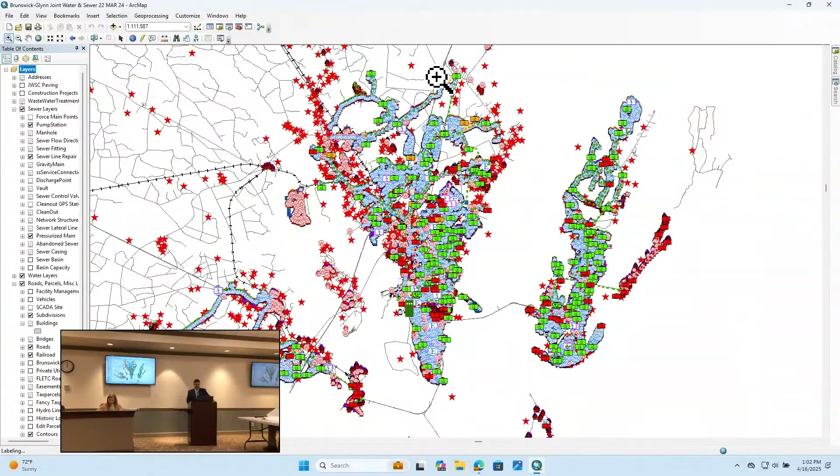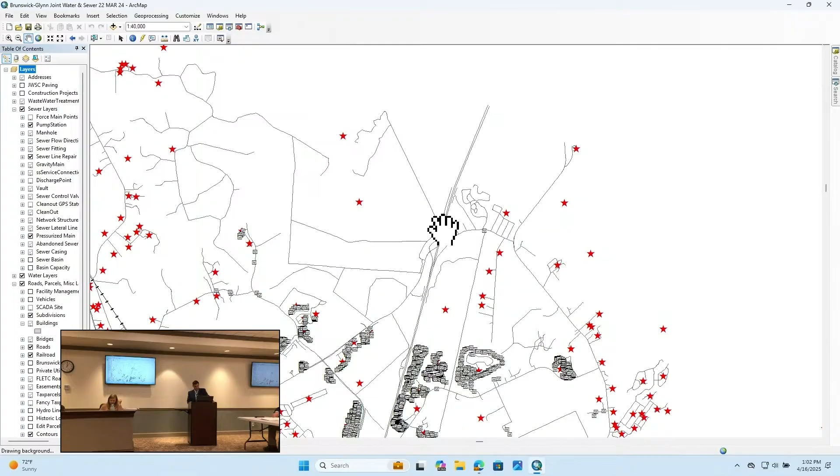So Hoyer Investment, HIC Altama, owns the property on the northwest quadrant of Exit 42. And we approached them about potentially acquiring property from them to construct a new wastewater treatment plant to service the North Mainland area, essentially the area along Exit 42 down Highway 99. They were willing to discuss, and as part of their discussions, we, at the February meeting, brought forward a proposal for 16 acres. Today, the proposal is to acquire 20 acres from them per that discussion. And also, they are installing larger diameter gravity sewer pipe opposite the direction they would need to flow from their development back towards the new plant site.

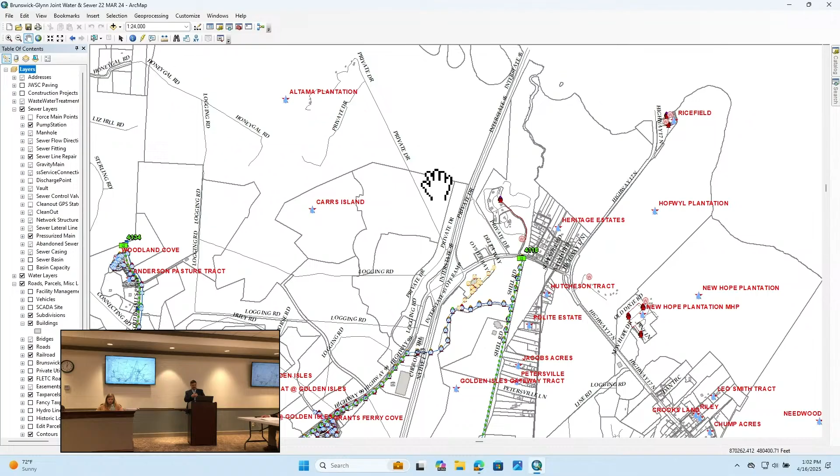So essentially, their development is here on the screen. They could gravity flow back out into this intersection here, or proposed intersection at Highway 99, but they are installing gravity sewer back towards the north, towards the plant site, and they're installing larger diameter gravity sewer above and beyond what they need. And they're also in the process of installing force main all the way, and a pump station all the way to connect into the force main on Shell Road at pump station 4118. So all of that is under the works right now.

And so the agreement that is before you is to acquire the 20 acres, and because of the discussion at the last meeting, the agreement lays out that within 60 days we will contract with somebody to do the survey of the 20 acres and then get that appraised at today's market value for that 20 acres. And then once the on-site construction activities are complete, the on-site construction activities are all of the work all the way to this connection point here, the value of that will be appraised against what the value would have been for improvements that would have been required without the wastewater treatment plant.

This agreement would provide them credit in the amount of that difference. So the value of the property and the gap in the larger diameter gravity sewer and the temporary pump station that's being put in place and the force main improvements towards, they could use for tap credit on their property, which is approximately 2,000 residential units plus some multifamily and commercial units along the road frontage.

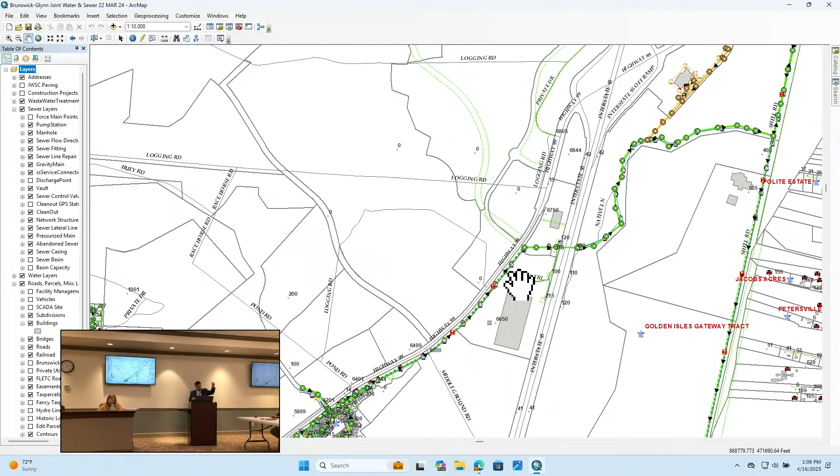Mr. Dormany is here, can speak to the agreement as well. We have representatives from Hoyer and their engineer, Thomas & Hutton, and we'll be happy to take whatever questions you may have at this time.

The 20 acres we talked about last time, it was 16 acres right here. The other 4 acres we discussed would be off of the west side of the original property, which would increase the amount of available buffer space we would have between the residential development and any active wastewater treatment equipment.

What's the schedule for them starting the project? Starting which project? They're actively putting the pipe in the ground now, and on site on the first 2 phases, or just the first phase? Just the first phase. Just the first phase right now.

So when are you planning to turn over lots for construction right now? Yeah, it's probably going to be Christmas and maybe January. So end of the year, first of the year, start building houses out there, roughly.

So the on-site phases are currently underway. When do you think it'll be completely built out? Or 50%? And as you know, sir, construction of a wastewater plant is a 4 to 5 year process.

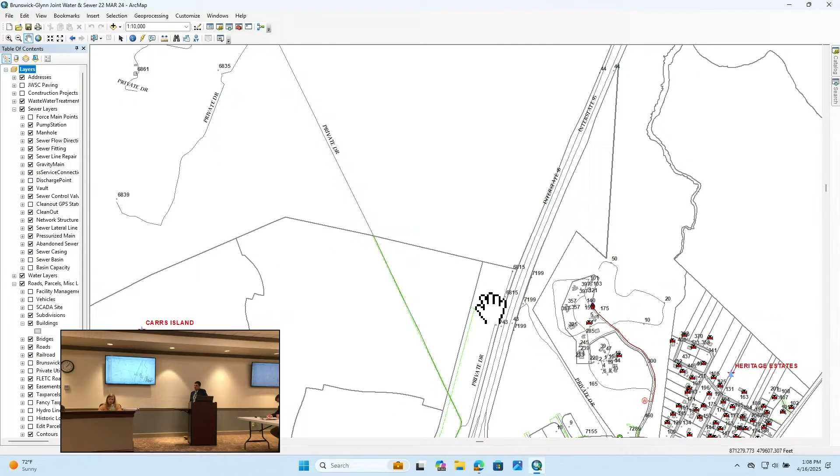So we have access through the property. Are the roads in there now? Have you already cleared for all the roads? We are constructing roads currently as part of the first phase. All the roads within the project are anticipated to be turned over to Glynn County to make public right of way.

As of right now, there's access all the way up to the temporary pump station via the existing WMA road that is owned by HIC. There's an access easement on it for WMA to use, but that can be used by anybody coming to the property to get to the existing temporary pump station.

How do we have access? Will our access change over the period of time? No, so we platted an access easement that goes all the way up to the southern boundary of the property. That's a part of our subdivision plat that we initially created. And so you'll be able to use that.

Obviously, paved roads is going to be public. Once that paved road stops, you will have access via that private access easement in order to get all the way up to the pump.

Basically, we probably won't even have that. You'd probably go right up to the treatment plant site just about, won't you? You'd probably almost go all the way up to the treatment plant site with your road for the setback. Long term, yes, sir. Yeah, once the roads are constructed, they will go right up to the treatment.

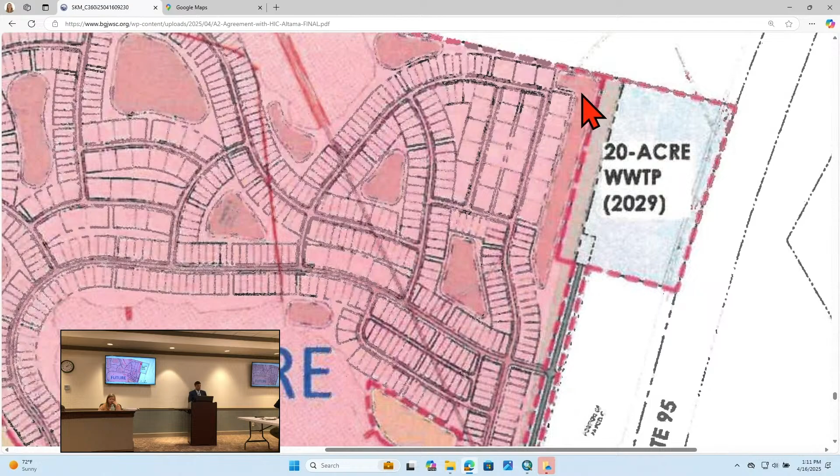Chairman, once the survey is completed, the developer is going to provide a temporary access easement for construction, so we can go ahead and start doing work on site while we're going through that process.

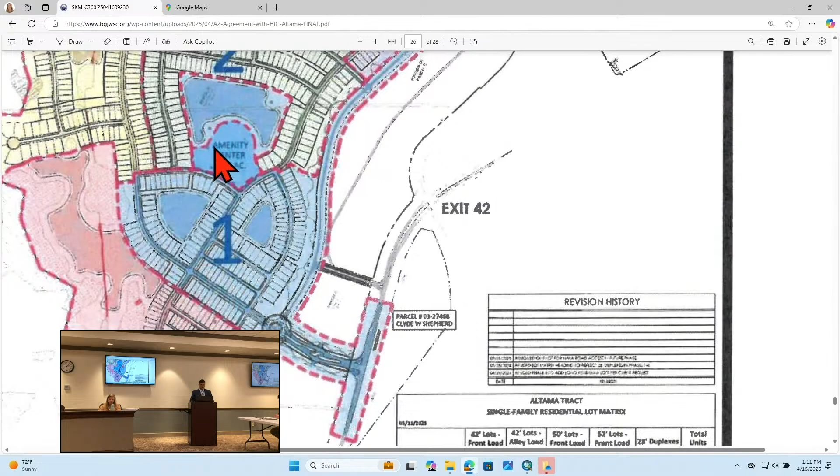So they're building out to here right now. This is the temporary pump station site, and this is the first 6 phases, which is roughly 800 lots. Then this is the future phases that would come on as they did additional work at a later date.

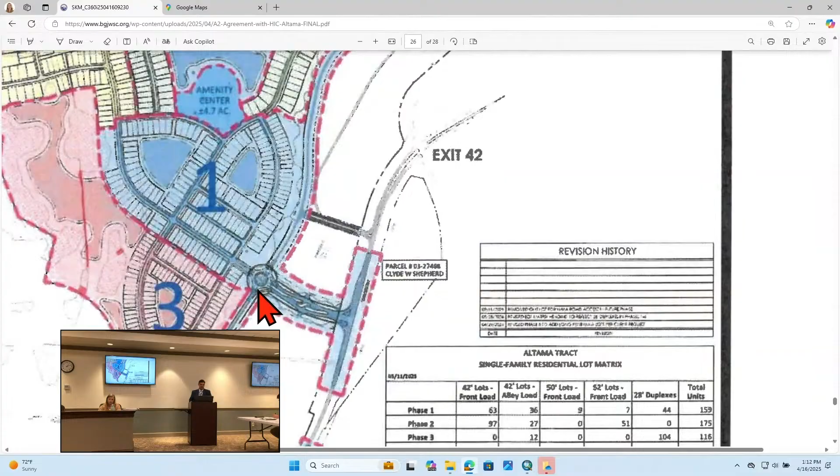Roundabout coming off 95 -- it'll be right here, right? Right here, yeah, right here and right here. You'll have to go through that roundabout off of 99. And they have one internal to the property too.

How do our trucks, sludge trucks, get to Academy? They would come down this roadway and then go down 99, likely all the way to 341, and then come down from 341 at the Sterling intersection, because otherwise we're going to spend a whole lot of time sitting on the spur. I don't want to do that.

The future well-lit intersection of 99 and Golden Isles Parkway will go through there. Hopefully. Hopefully soon.

So again, today we don't know the value. We're just agreeing that if we move forward with this, whatever the value is appraised at, that is the value of tax credit they will be receiving. So we can't give you a specific dollar value today, but it's estimated at around $5 million.

Do we have a motion? Mr. Chairman, I move that the Facilities Committee recommend entering into agreement with HIC Altama LLC for 20 acres of property and additional infrastructure improvements for enhanced water and wastewater services along and near Highway 99 and Exit 42.

I'll second. Motion seconded. Any other questions?

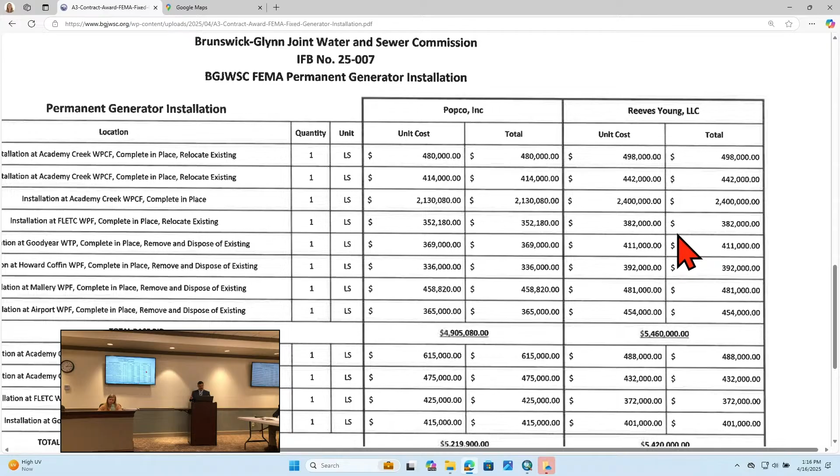So the 1,500 kW generator, let me pull up the site so I can show you, will be located very near the operations building, and there'll be quite a lot of conductor that has to be run. That large diameter wire is where the bulk of the cost is with this large generator installation.

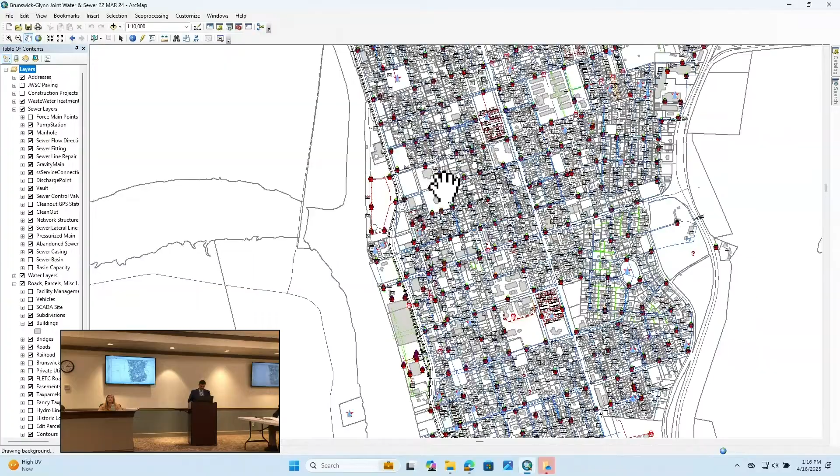Where am I at? I'm way too far south. There we go. We got too many layers on here, got to turn this thing off.

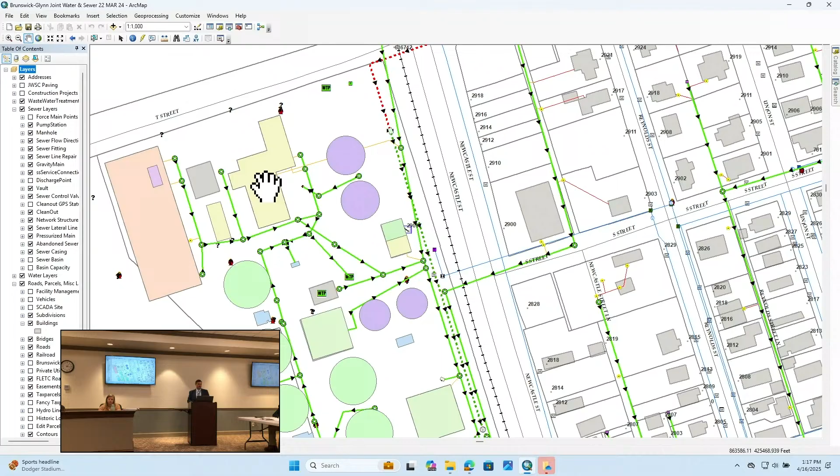So this is the operations building here, this big yellow thing. We're going to be putting the generator in this vicinity right here. It requires building a platform and installing a new transfer switch. We'll be running conductor down the roadway into the solids building, over to the UV building, and into the backside of this building. That's where the bulk of the large generator cost comes from, the construction of the platform and the conductor. My understanding from talking to suppliers, there's approximately $1 million worth of wire in that job for the size conductors we're running.

So the other ones you can see, there's 3 of them at Academy Creek. The one large one, the other 2 small ones will be replaced. Then there are 5 well sites: FLETC, Goodyear, Howard Coffin, Mallery, and the airport. All 5 of those will be replaced with new generators. All 8 generators are currently on site at Academy Creek, ready to be relocated.

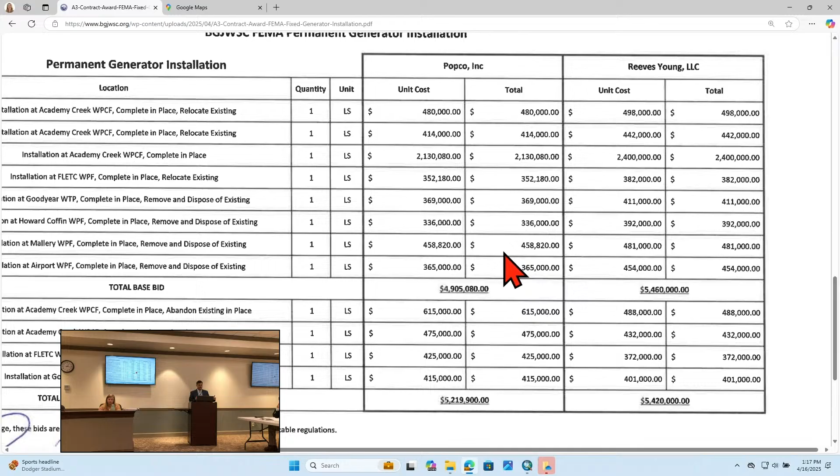The low bid is from Popco, who has done a considerable amount of work for us recently and is actually very near ending a lot of the work they're doing with us, so this timing is going to work out pretty well. Again, the low bid was $4,905,080. So the combined cost for the purchase of the generators and the low bid is $6.1 million.

That $6.1 million is substantially over the approved funding for the FEMA project of $1.3 million. We will be requesting a budget adjustment from FEMA. However, we have no guarantees that will be granted. So if we award this today, it is at risk that the additional money will not be granted. However, we've got 8 generators that aren't doing anything if we don't award and put them in place.

You can't put that 1,500 generator closer to the building? Not because of all the additional piping that's in the ground back there. There's a spaghetti of pipes back there, so there's very limited options where we could put it. Also, it's 40 foot long, and space is not something we have a great deal of at that site.

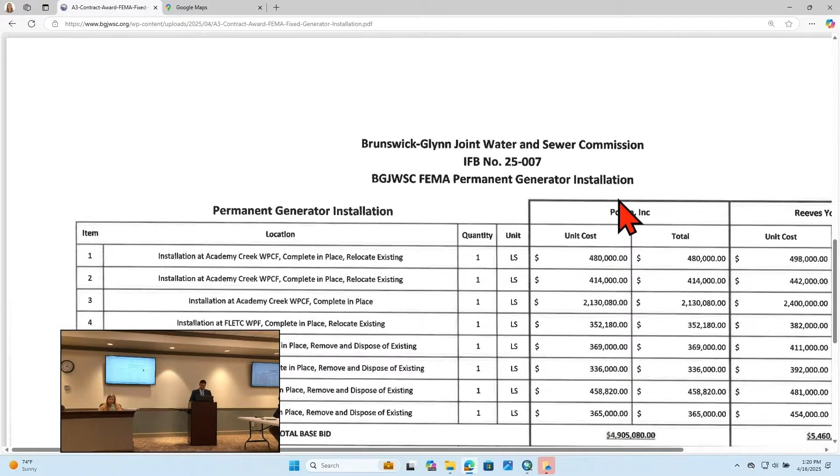All right, so this is, I'll say, the numbers confuse me.

What we were planning to do, if you look at the bid - and FEMA likes you to do it this way - is a complete in-place, one number approach. It states whether we want to relocate the existing generator away and put it in the same place, or if we want to abandon the existing generator in place.

So we bid out the ones that it made sense to potentially save us money on, abandoning the existing generator in place and relocating it to install a different one in a separate location. The numbers did not seem to matter much, or went in a direction that didn't make a lot of sense to us. So we are recommending the base bid on this rather than any of the alternate items.

And the base bid is to remove and dispose of all of them that are currently in place. They're not disposing of them on site - they'll be relocating all of them to Exit 29, to the Southport plant, and then we will dispose of them for scrap value. And we'll rob whatever parts we can off of them that may still be useful.

Most of them have quite a lot of age on them. There's one of them that's not in too bad of shape - we might be able to repurpose it, but the other ones are either non-functional or are very much band-aided together to keep them functional right now.

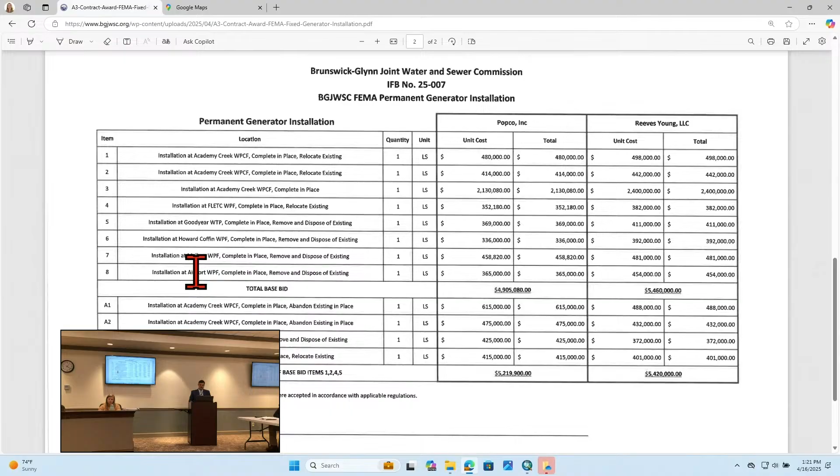And the transfer switches, have they been installed? They are here, they're not installed yet, but we have all transfer switches as well. They have to install the transfer switches - do they have to do both portions? Yes, so this is transfer switch, generator pads, the whole nine.

What did you award that to? Two separate transfer switches. We had pump station transfer switches installed for the first portion of the GEMA contract. These fixed generators came with new transfer switches that have not been installed, but that is not any of the locations where the previous transfer switches were installed. We were also awarded a second phase of the transfer switch project for more pump stations, which we have to put out for bid, but none of these locations are the same.

So all of the transfer switches are at sewer pump stations. These are all either the three at Academy or at water well sites, so they're not any of the same locations. And they are all Cummins diesel generators that we purchased.

We don't have one at the North Monument site yet. Not yet, no sir - that would be purchased during the project.

This is going to consume most of our uncommitted funds - most of our uncommitted R&R funds right now, yes sir. If we don't get them redone, yes sir.

We're still waiting on reimbursement for the first phase of the project. That's not going to be a huge amount of money, but we're still waiting on that. And of course, we transfer funds into that on a monthly basis, so we're going to keep utilizing those funds as we accrue them, but this would consume the bulk of the currently uncommitted funds for projects.

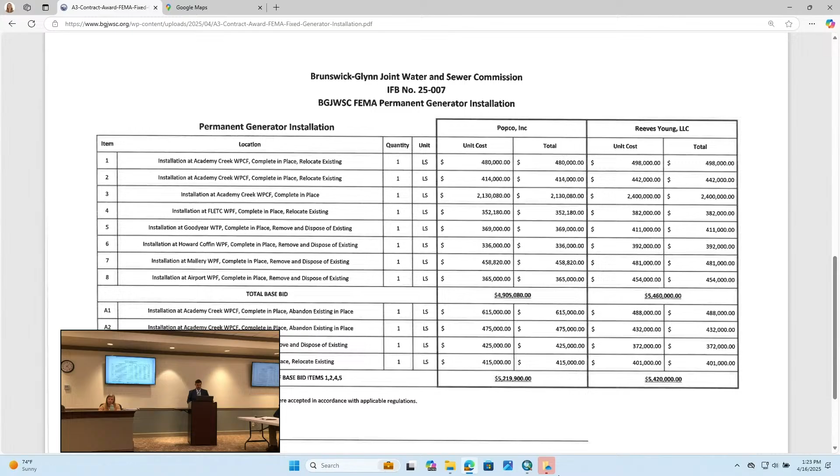How, based on our past record, does the uncommitted funds grow if we're not tapping it? We currently transfer approximately $750,000 a month into that uncommitted funding, so it's about $9 million a year.

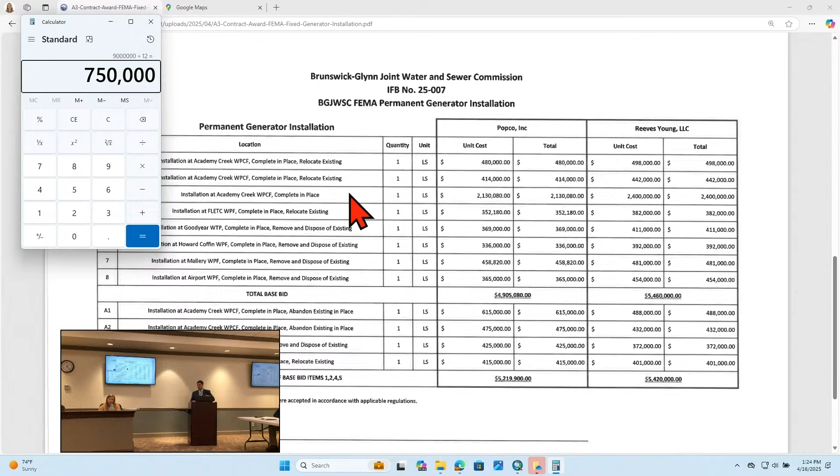Next year's budget, which we'll talk about at the Finance Committee, puts $10 million in there, so that would be about $800,000 a month that would go in there at that point.

When did they start design of this? They did sizing of the generators first. We waited 84 weeks for the generators to get here, and then they started design after that - so they probably started design on this late '23, mid to late '23, sometime in there. Yes sir.

It did take a little bit of time to get the design completed, particularly once we had to get a structural engineer involved to design the platform for the big generator. That stalled us for a few months as well. So yeah, we were awarded funding in 2020, but by the time we sized the generators and got them bought, that was a two-year process.

How are they going to raise that up? Concrete. We're just going to pour concrete to get it out of the floodplain.

There again, the belly tank counts. Where's it located on that site? Well, I don't remember exactly where it's located now, but if you give me just a second, we sent an addendum.

Krista, you didn't delete my addendums off the website, did you?

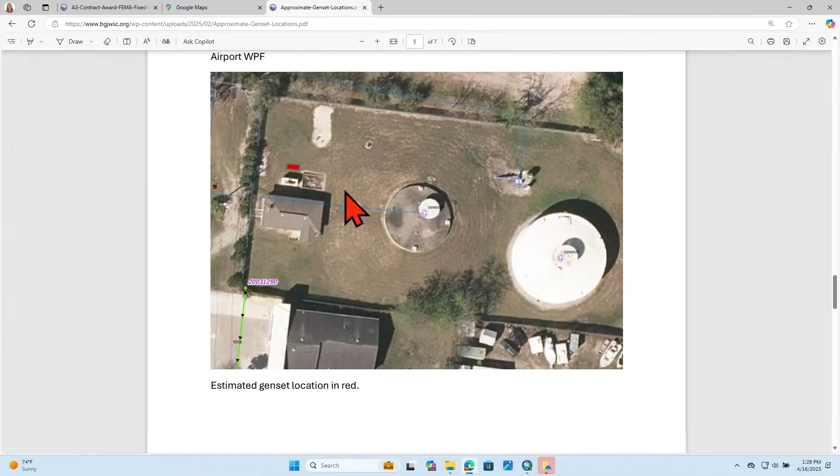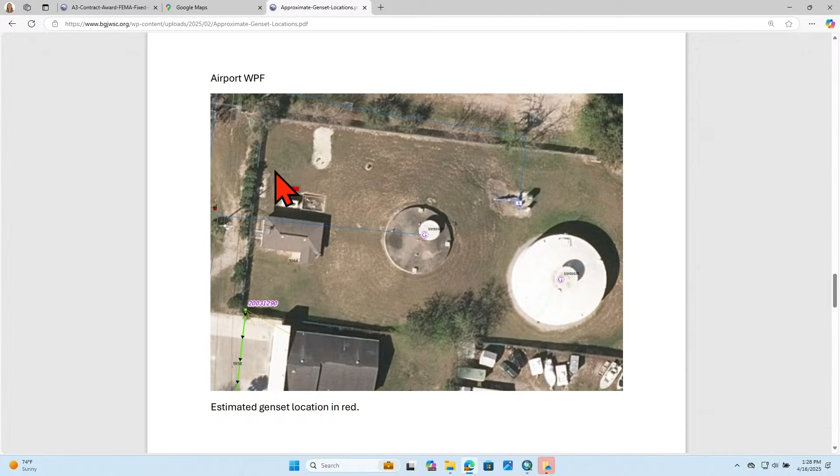And then this is the airport site on St. Simons, which is probably our most open well site we have. If we had this much property at every location, we would have much more flexibility. So it'll go right here behind the existing generator.

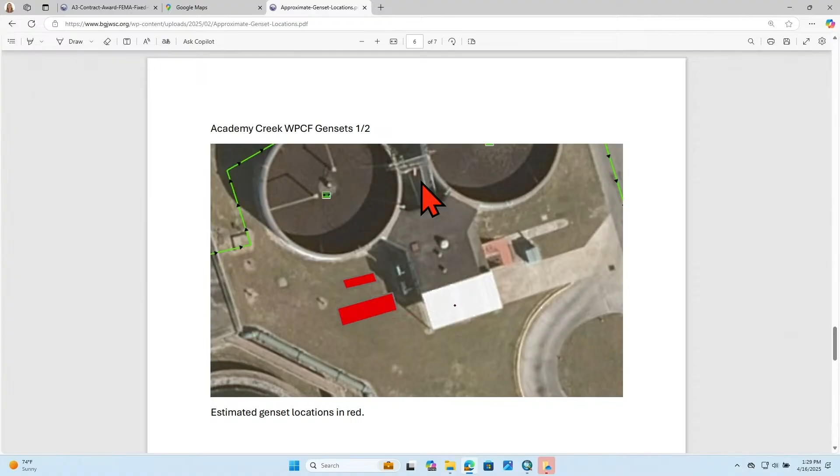And then Academy, the existing generators are in this brick building here. We'll be setting the 750 and the 450 here, right outside digester 2. And then here's where the new generator goes, this building is no longer there, that was a portable building that has been moved. So we will be consuming a portion of the sidewalk here, but...

Where's that? This is, okay, if you're over here, this is the admin, this is the lab building. This is the admin building and the warehouse. This is digesters 3 and 4.

Because of the way the drain system works out there, we're very limited in the places we could actually put a generator this size. So they're going to basically run conductor all the way down the edge of this building, paralleling this gravity main to stay out of having to cross that gravity main with those large diameter conductors.

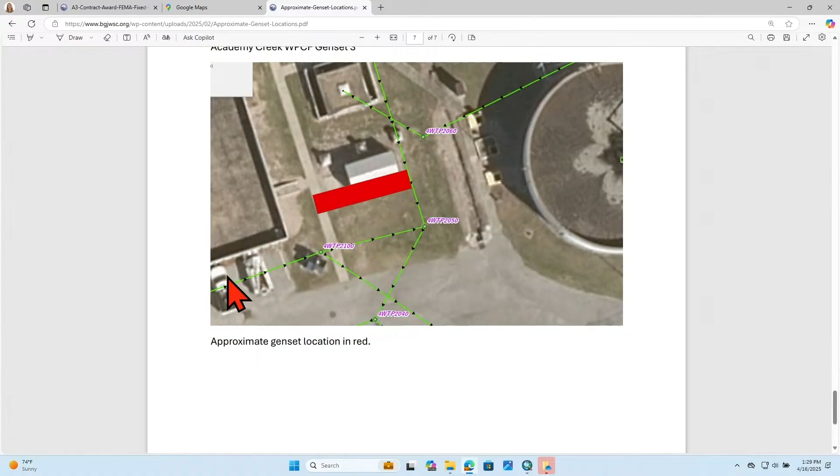What structure is that right to the left, Andrew? This here? This is the warehouse, the old DAF building. And this is the old Pinova pumping building that doesn't do anything anymore.

So we talked about tearing it down and putting it here, but then you got a whole process of demoing that, rebuilding the slab. So that was actually going to cost us more money, and we went through that process of examining that for a while.

If you go down there now, this generator is sitting right here off the side of this digester now.

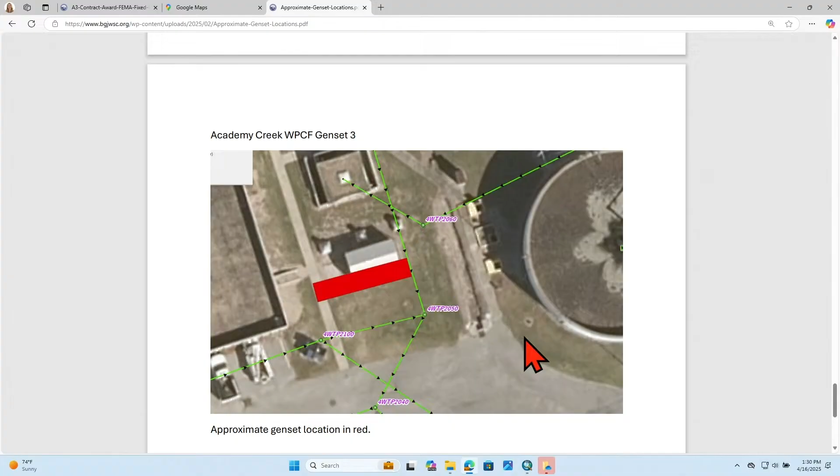How long do they have to do the work? 9 months. And the first 3 they're required to do per the bid documents are the 3 at Academy Creek.

When we paid for the generators up front, we paid something and they get reimbursed, right? Yes, with the FEMA process. Until the project is complete, you cannot request partial reimbursement. You have to finish the project, then request reimbursement. So we've paid for those for a couple years now, but we can't request reimbursement until they're installed and in service.

Another reason why, we're loaning the government money. Right now, we've loaned them a pretty good bit, about $1 million that we're waiting on reimbursements on right now. So when we get the reimbursement back for the first phase of the transfer switch, that will help go into the uncommitted funds as well, as you were talking about earlier. So there's things like that that help rejuvenate those funds.

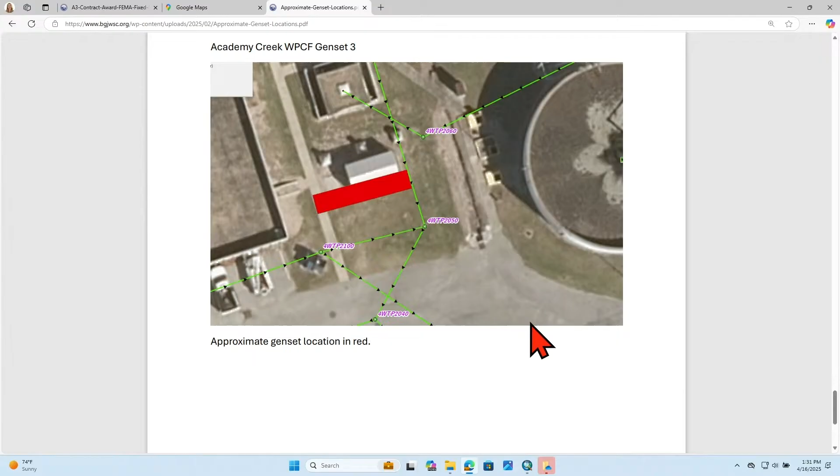No, we have not taken a motion. I move that the Facilities Committee recommend awarding a contract to Popco for the installation of 8 fixed generators in the amount of $4,905,080. Second. First and second, any other questions? There's 3-0. Thank you, Andrew.

Dedication of easements and infrastructure, Mr. Kline. All right, Mr. Chairman, Commissioners, good afternoon. We have 3 items on here. The first 2 are associated. They're side-by-side easements resulting from 2 adjacent property owners requesting an alley abandonment from Glynn County. These 2 are on St. Simons Island, just off Circle Drive. And the third one is an easement we've acquired to help facilitate, actually critical for us to facilitate, Division 3 of our Exit 29 water loop project.

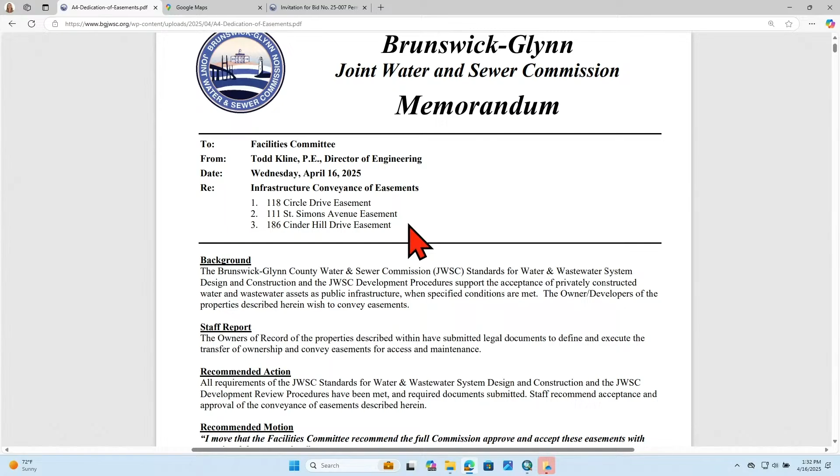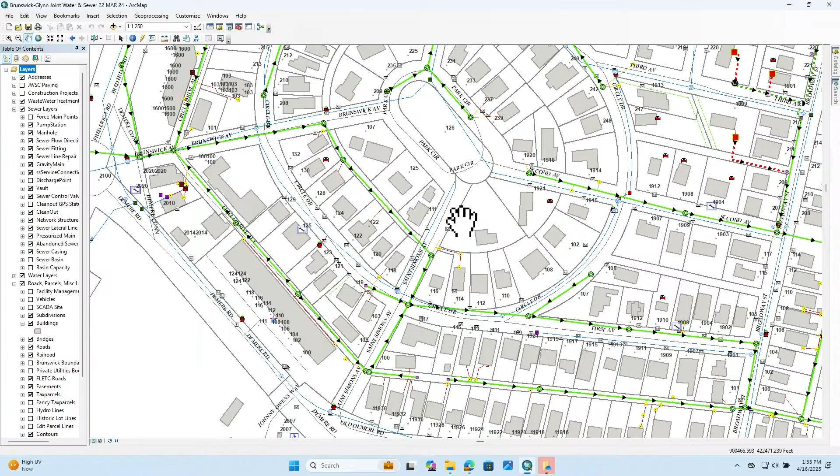All right, jump down here and show you the locations of these things. First one, Circle Drive, just north of the St. Simons Island Airport. Sorry, got you off your bookmarks. That's why I bookmark them. Let's see. Okay, all right, so this is the area we're talking about here, this alley section in here.

Within which Joint Water and Sewer Commission does have water and sewer assets. In this case, it's a gravity main, needs to stay there. And so we've obtained an easement from 111 and then also 118 right here. These 2 property owners submitted to dedicate easements to us for that. We have that sheet in our...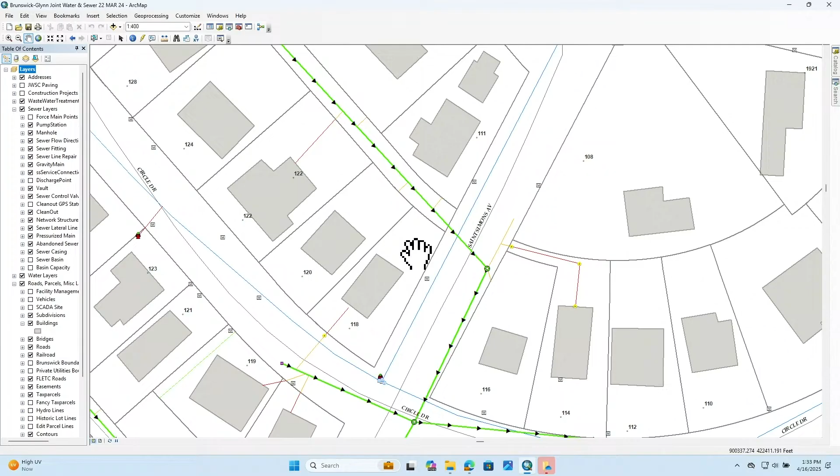There's an easement screenshot plat of it. I see this, I don't see anything. Do y'all see this one? Pull it up on the screen also here. Yes, sir, it's about halfway back in that item in that packet. It folds out. So past the easement documents, there should be... there we go, something that's folded together there. Yeah, this one right here.

And the first 2 items are going to look exactly the same, basically the same easement plat, where it's referenced in the legal descriptions. A separate one for each easement.

This is pretty typical. We see a lot of unopened right-of-ways. Property owners have the right to request abandonment out to the middle of said unopened right-of-way, which extends their frontage on that right. We see these as they come in as abandonment requests through Glynn County's review process. First thing we do is check what assets we have there, and second, is there any potential for future joint water and sewer assets? If so, we will typically request, as a condition of joint water's endorsement of that abandonment, provision of an easement.

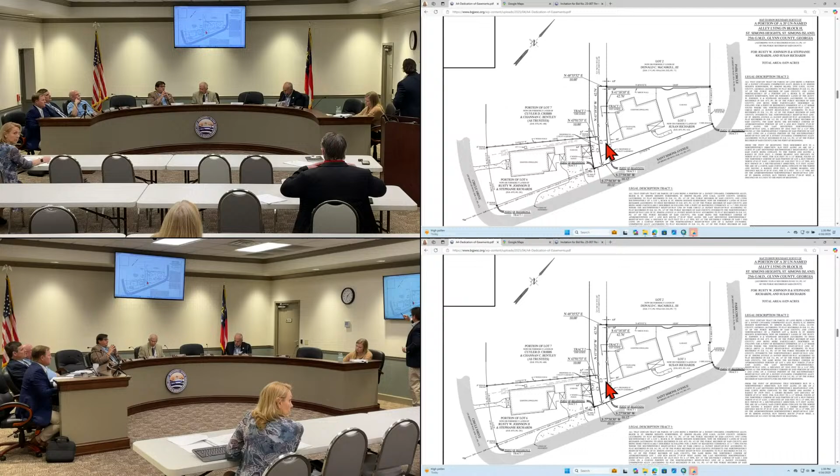What are we requesting? What do they want on this? Well, they're granting an easement over existing sewer lines because they're requesting the county abandon the unopened right-of-way to them. So the two property owners are right here and right here. This property owner wishes to abandon, or for Glynn County to abandon, this portion of their alley, unopened alley right-of-way. This property owner wishes for Glynn County to abandon this portion. And we have a sewer main that runs down this unopened right-of-way.

So what size easement will we have? It's total width... 20 foot, it's 20 foot. County's abandoning the roads and we're getting an easement, is that right? That's correct. It's not a road, it's unimproved right-of-way. Yeah, they call it unopened alley, unapproved, yeah. It's currently public right-of-way, but it's just not used for public ingress egress.

No, sir, because it was public right-of-way, unopened, there was never an easement. So what size easement are we going to have? Each one is donating—well, the abandonment is to the center line of the unopened alley, so it's 10 foot on either side, so it's still going to remain the 20 foot that it is now with the right of way.

Everything else above here is going to remain public right of way, unopened. As adjacent property owners see what happens here, they're probably going to request theirs, and typically that's what happens. But that hasn't come to the county yet. No, sir, these are the only two that we've seen. But this is fairly standard for the county to do this at this point.

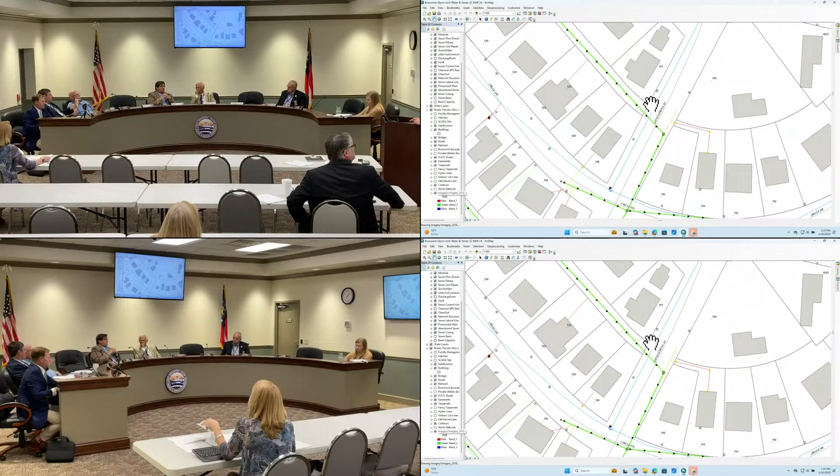If they're not trying to alter the alley, it's fairly standard now. Back when a lot of this was installed, they took advantage of those unopened right-of-ways and put lines in, so that's why we always request the easement at that time.

That gives a little better picture there. You can see that it's obviously not used, or apparently not used, for travel. It's heavily wooded. We should probably get in there every so often and make sure we get the old sewer easement mains back in.

Okay, south end. All right, so if no more questions on that one, let's take a look real quickly down at Cinder Hill. This is the exit 29 area.

Here is the exit 29 treatment plant. This is where our exit 29 elevated storage tank is going. We're going to have a water line that connects out to the water main on Southport.

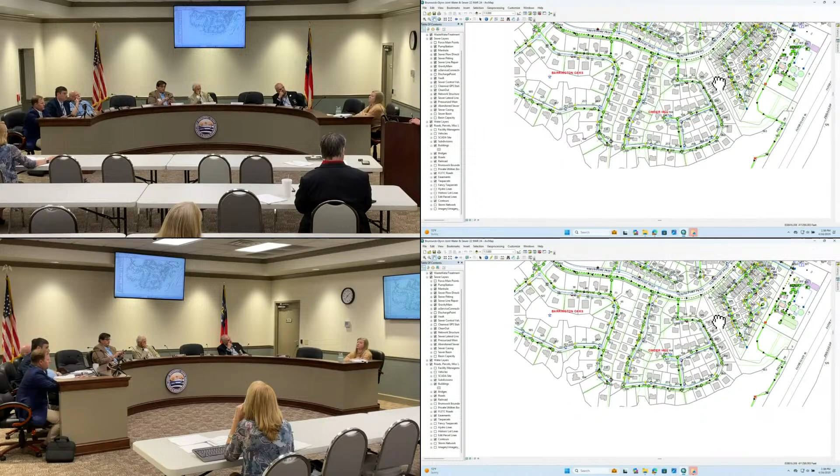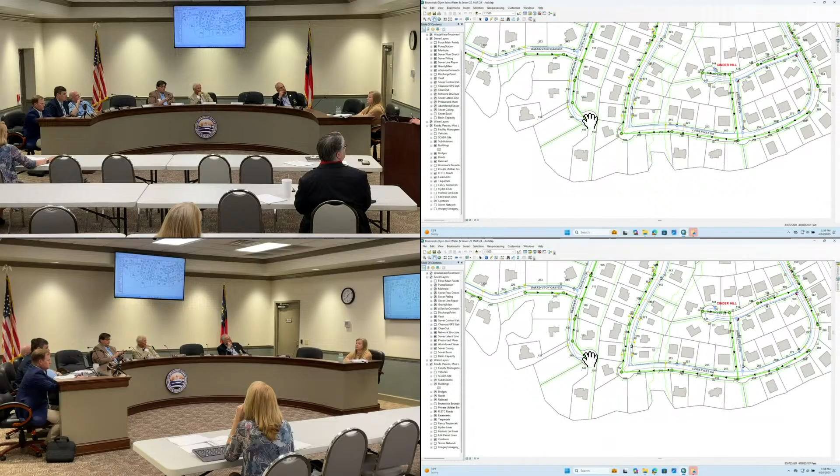And then as part of the third division of this project, we're making two key loops. We're actually going to loop up here on Cali, back out here to the water main on Southport. The second loop is going to be here between these two subdivisions, Cinder Hill right here, and then Barrington Oaks.

In order for us to do that, we needed to obtain an easement from either one or both of the property owners. The property owner at 186 Cinder Hill Drive was receptive and has agreed and endorsed dedication of a 10-foot water main, water and sewer utility easement for our water main on his property wholly. So the whole 10-foot easement will be on this side right here.

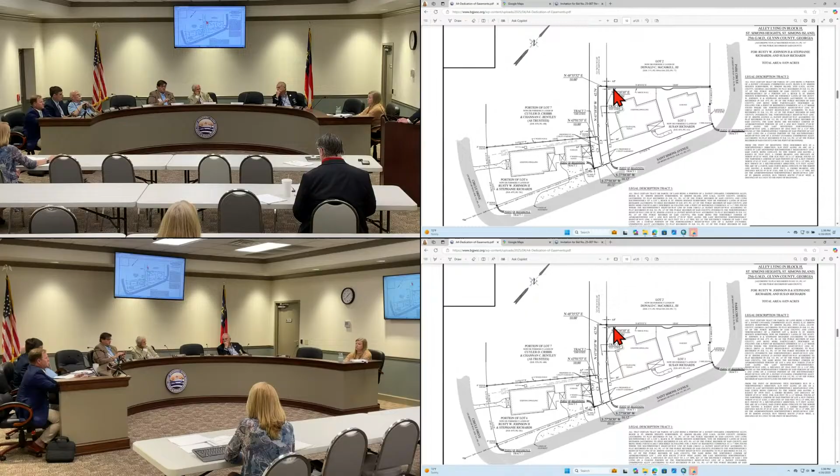And then when we connect those together—currently both of those neighborhoods are single fed off of Southport Parkway—so once we connect them together, the single feeds into each neighborhood will actually make both neighborhoods be looped out there, which will help water movement, flows and pressures out there. That's right, here's a plat for the easement.

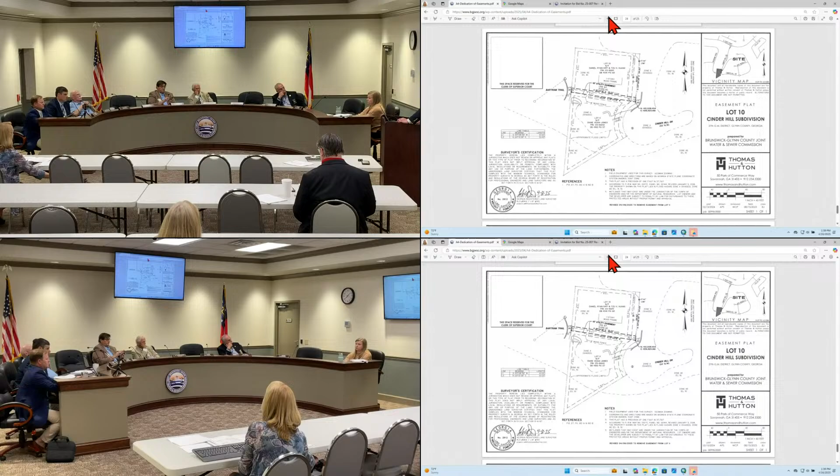Is that the water line we're putting in to serve the tank? Not to serve the tank, but when we were doing the tank project, we were looking for locations that made sense while we were down there to go ahead and install these loops.

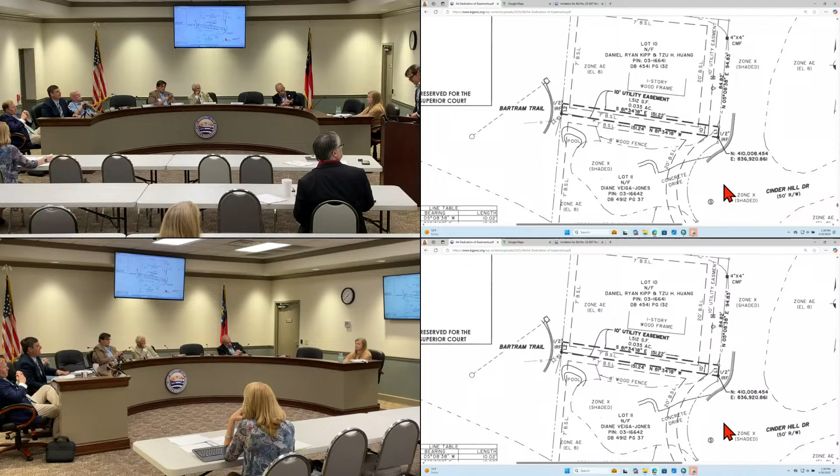We try, as part of the private development review process, to get loops where we can. Sometimes it's not feasible, particularly if neighborhoods are built at different times—there's already structures in the way. So this didn't happen at that point, but this will be a very helpful, real convenient loop to help stabilize flows and pressures in that area.

So we're just asking for an easement on this. A total of three easements, correct? The first two are associated there on Circle Drive, and this third one is in between Cinder Hill and Bartram Trail.

Where are we on the encroachment on the water line we want for the new well? Did we get anywhere on that? We don't have to dwell on that now. No, that's not impacting here. That's part of feeding the new elevated tank, the Cinder Hill tank.

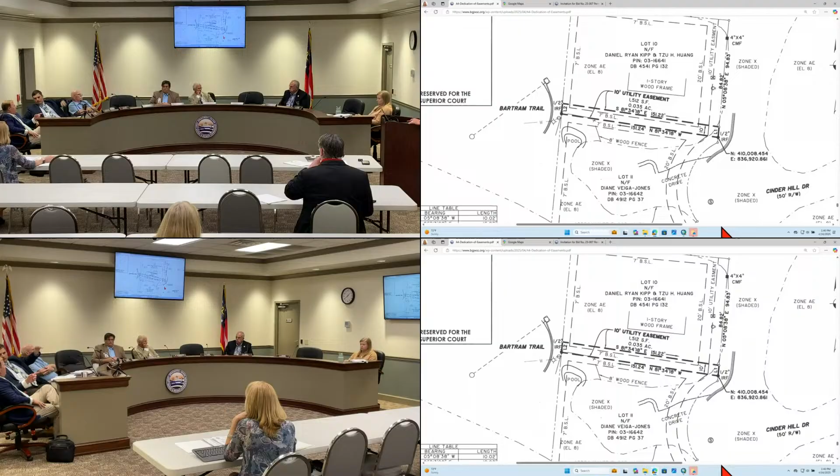I think he's understanding what is being requested. That's the guy who's—but he is encroaching on us. That's correct.

Okay, he's got the swimming pool, right? Yes, sir, that's it. So the property line here, this is joint water property, it's a parcel actually, so their existing fence comes as far in.

What we approached him about was essentially putting his fence up against his pool decking, and whatever property is required to go outside his pool decking, he would get that resurveyed, appraised, and then he would compensate us for that amount of property. That's in the process of being worked through and on track to not be a further issue.

Yeah, I don't think that will come into play with the project for a while, because once the tank site gets built, the water line will be one of the later things that goes in. Okay, I didn't mean to get us off of that, but...

Well, can I have a motion? I move that the Facilities Committee recommend the full commission approve and accept these easements with associated documentation. Second.

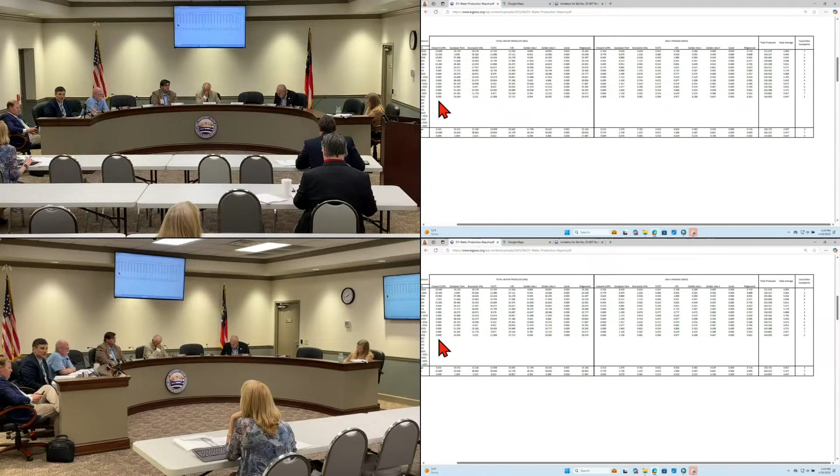On the mainland system, the Howard Coffin well is very near being brought back up. They've completed the grouting of the new casing. Remaining items are to reinstall the well pump and motor and get it turned back on. So unless something wildly unexpected happens, it should be back online by the end of this week.

The Goodyear Park well is taking the brunt of Howard Coffin not being online, so we really need to get Howard Coffin back online to knock some of that usage off of Goodyear Park. Excluding that, Brunswick Villa well hasn't been used very much. We're trying to use that less and less whenever possible. It does come on, we turn it on manually periodically, but we try not to turn it on automatically due to it being the closest one to the saltwater plume.

Across the board for the month, 4.6 million gallons a day on the mainland, and 2 water complaints, both dirty water complaints post-flushing, which tends to happen when you flush lines, stir stuff up, and then when it's been sitting in the service, you get some dirty water when you turn the faucet on. But you do see a slight reduction in water usage from this time last year.

Some of that could obviously be leaks being corrected by customers who were notified about leaks through the new meters. Some of it could also be lack of water use from a previous large industrial customer on the mainland impacting that.

For St. Simons for the month, that system was pretty well balanced considering the densities south and north, at 2.4 million gallons a day on St. Simons for the month of March, very much in line with where we were last year. It's kind of remarkable how close it tracked the first 3 months of the year, with very limited flow differences month to month, as we head towards the peak of tourist season where we'll have the most water usage on St. Simons.

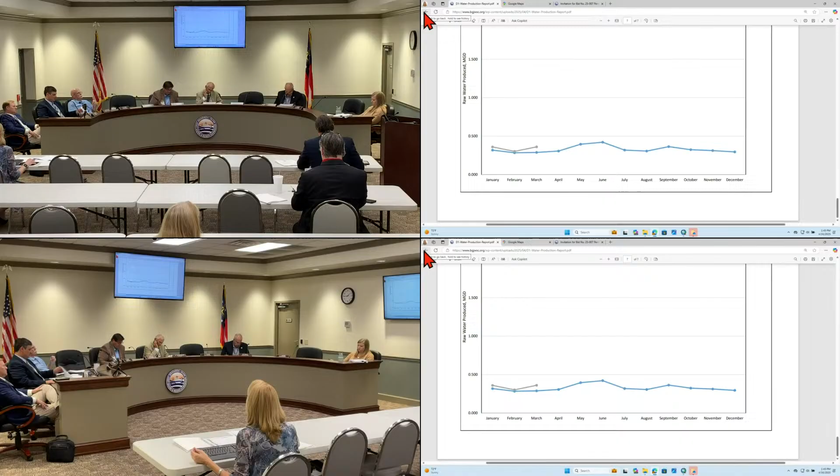Any questions on the water report?

All right, Academy Creek for the month on the wastewater side, 6.4 million gallons a day leaving the wastewater plant. Actively under construction wastewater plant. If you go down there now, there are people everywhere, so make sure you're wearing your PPE if you show up on site.

But you'll notice one thing that should jump off the page, the influent TSS number. We are artificially increasing our RAS rates at the plant by using the drain systems on the clarifiers because our pumps won't do what we need them to do. That's why we're trying to replace them. So that is artificially increasing the influent TSS numbers as we're sending solids back through the influent. However, it's not causing problems at the plant because the TSS leaving is 4, so we're doing well there.

Did see the ammonia had trended down after last month. It has further trended down month to date, and they are set to begin working on the RAS stations to install the new RAS pumps on Clarifier 5 next week, then they're estimating 2 weeks per clarifier to redo the RAS pumps, the piping, and complete the electrical changeouts there.

But for the month, 96% BOD removal, almost 99.7% TSS removal based off that influent number. And then did not move as many solids for the month as we did previously. The month of April will go back to where we had been the previous 2 months. We had some downtime with our presses and with some staff members that impacted that, but they are back to running 24/7 on solids too, so that we can waste additional solids out of the clarifiers and further reduce the ammonia at the facility.

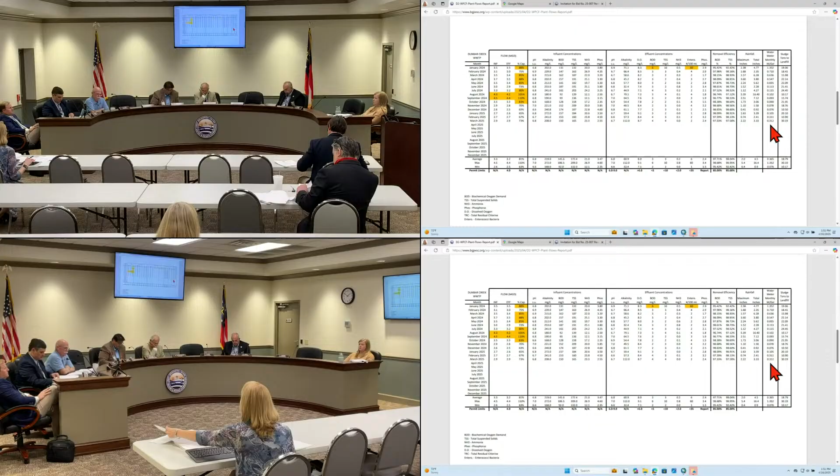If you look at the chart on the back, we're not 100% sure exactly where all the holes we found were, but we've corrected a great deal of bore-throughs over on St. Simons, and it seems to be paying a tremendous amount of help to us, because the flow is considerably lower than it was this time last year at a facility that size. We're continuing to work through that process, but we also haven't had substantial rainfall yet, so that's helping as well.

At Exit 29 for the month, a little over 560,000 gallons a day, about a third of capacity used down there. But that plant is operating very well too, kind of down there by itself. 96% BOD, 97.5% TSS removal. We did run a little more sludge at Southport than in previous months. Sometimes we don't have to run sludge there because we have so much excess capacity in the digesters, but occasionally we get a little behind and have to make up some ground to make sure we continue to have excess capacity down there at Exit 29 in the solids handling processes.

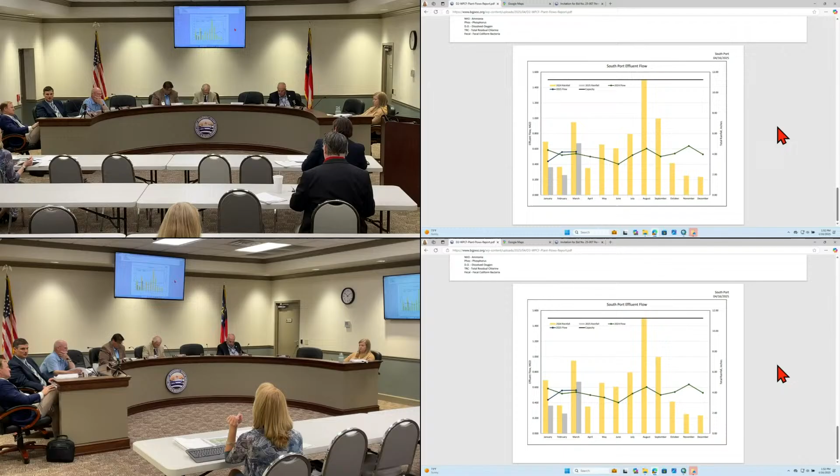Again, very similar to where we were this time last year at Exit 29, which does tend to lead us to believe that a lot of the water usage increase we're seeing at Exit 29 is outdoor water usage for irrigation and other uses.

Most of the septage comes to Academy Creek. All of the septage comes to Academy Creek. We don't accept septage anywhere else.

Where does it go once it gets to Academy Creek? Into the influent. They come in right there by the generator building, there's a little turn in there. You turn in right there by the generator building between the generators and AB2. It's a circle drive, they dispose right there. That drains through that 42-inch drain into the influent, goes through the bar screens, grit, the whole nine, yes sir. It used to go straight to the digesters, and long term that might not be a bad idea to go back to that.

All right, thank you. Back again for the construction progress photo report. I will progress through this fairly quickly here.

First project to talk about, ARCO area water sewer extension. We're nearing completion of this project. As it stands, all of the gravity mains have been tested and deemed adequate, and now the last little bit is some paving and cleanup to happen in there.

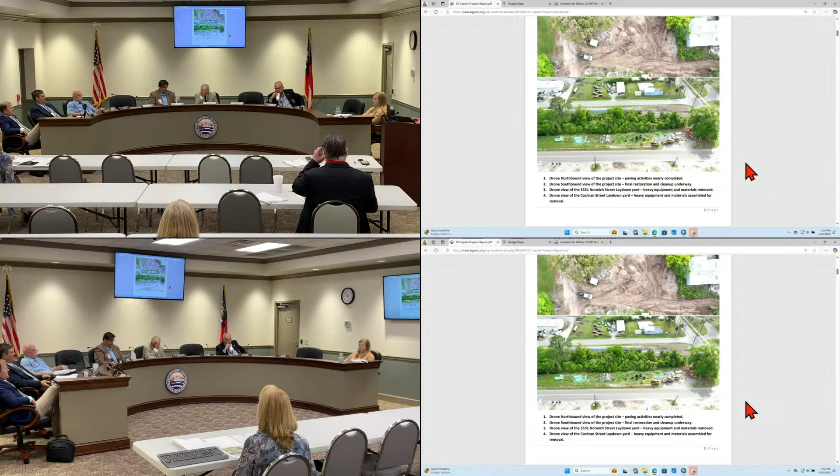Then bringing on the new customers. To that point, as he referenced bringing on new customers, we finally heard back from EPD that our grant, which we were awarded from EPD, has been approved, and we're getting the paperwork together. We have one question we need answered from EPD before we start the project, mostly about sequencing, not about how we're going to do it, but the sequence we need to do things in. Then we'll get that grant program out to the future customer base in the very near future.

Moving along here to Canal Road Water Production Facility, another excellent project that's nearing completion there. Last week there was a shakedown of the equipment, kind of a preliminary soft start we'll call it, to develop some punch list items and whatnot. There was a lot of staff involvement with the contractor, their subs, and the different equipment representatives there as well.

There's a good shot of the inside of our distribution pump, or service pump room. Peerless pumps there, looking good. That's a very nice layout we've got there. I was out there the other day. That's going to be very effective once we get that online. One thing different on this building is also the window access, you can see from one room to the next pretty easily. I think it eases the operators' job, makes it a lot easier.

This shot up top here is of something you may never have noticed, but on top of our ground storage tanks is an aeration tray. This is where the water comes out of the well, straight up through the center pipe here, and then it cascades over the top like a water fountain. Very beautiful, nice pleasing sound.

Puts you to sleep. And the purpose of this is to agitate the water and extract the naturally occurring hydrogen sulfide gas. Some people believe they can taste a hint of sulfur in the water. It has certain medicinal purposes possibly, but most people don't want it in their water, so we do this to extract and remove it naturally. No chemicals involved, it's simple aeration and agitation of the water.

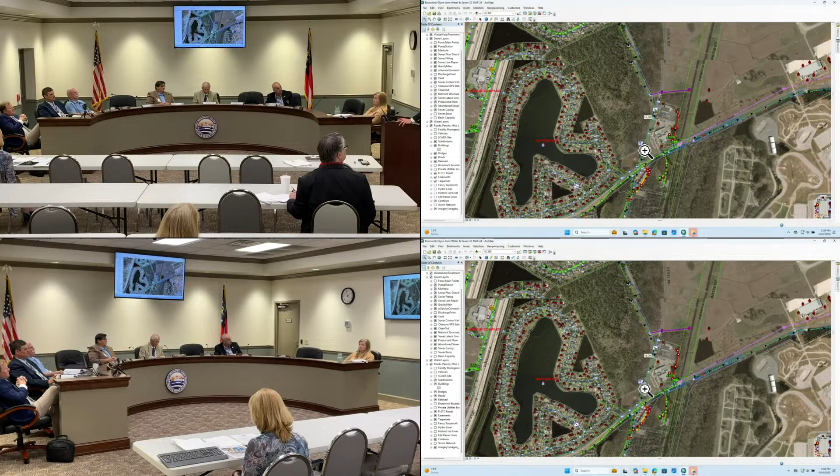There we go, the ortho photos are not updated for all the construction. Now, this is the well site, and out here we will come in and see where this way. Yeah, all these trees are no longer there. Come a long way on that road, made a lot of progress.

So we put a little structure over it, a fiberglass structure. It's not very costly, but at the very least, wrap some towels around that thing and help us out when it gets super cold. Most of them around the county are exposed. We did have them, it was a couple years ago when we had the big freeze, there was one hotel out at exit 36 that I think was the only one that didn't bust in that 4-day period where it never got above freezing, and they had literally taken comforters and just wrapped around it with duct tape. But that's all you got to do is basically give it a little bit of help.

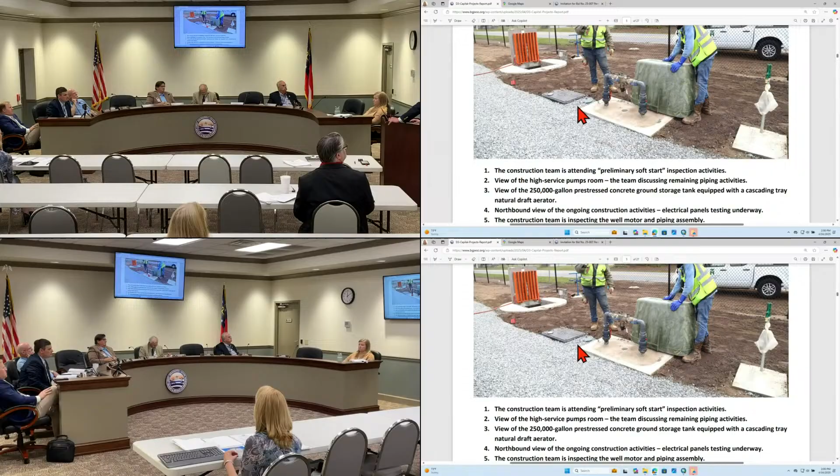For operator use on site, we still have to make sure our own hydrants and whatnot are accounted for. Notice that one of the new meter boxes installed there for the water meter reading for the site, little puck right there I believe. The site even looks better now today; these pictures are from last week. If you get out there, take a look around, it's looking really nice.

Next project is one of the group of 3 pump station rehabs here in downtown Brunswick. It's 4002, near Mansfield Street. A couple shots of the inside - it's a 60s vintage structure, pump station, looking like new on the inside now.

Refurbished. Do you have any idea what's still remaining on the punch list for that project, Todd? It's just final programming, down to the very minor electrical punch list items - a couple little things like a sump pump reconnection they should have done by now. Just minor little items to get it done.

Pump station 4044 - this is formerly known as Payless, or Brakes for Less. This is the location of the old station. Let's zoom in a little bit here - worth mentioning, this is the former location of Pump Station 4044. The new and improved Pump Station 4044 is here on a piece of property we obtained from the bank next door.

This is the crossing still to be repaved. The discharge goes to our receive manhole out in the roadway, and the paving will be done at night. We're exploring a recommendation from the commission to install some bollards here for extra visual protection in some areas. They'll handle that outside of this project, letting this one close up and doing that as a separate item - excellent suggestion and recommendation from the board.

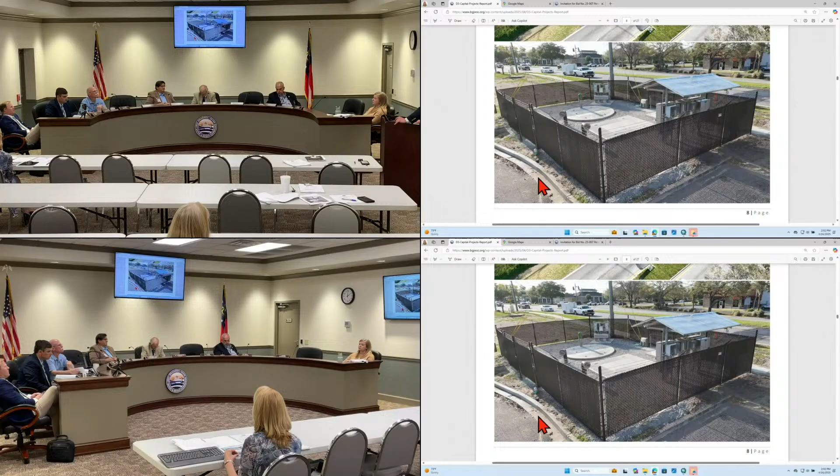So another good shot of the station there - it's a good looking station. And the cleanup around there looks good. They did a nice job out there, I was out there the other day - pass that along. Need some grass growing, but other than that it looks good out there. I had a contractor tell me one day he can put pipe and concrete in all day long, but he can't make grass grow.

The design has a lot of features that we've, through the years, worked heavily on with preferences and recommendations from operations on how they need things configured. So we're down to a pretty good standardization on our stations - panels, canopies, disconnects, all that. And speaking of standardization, we all know our industry tends to be very small. We've had multiple other utilities spend the day with us looking at our new pump station builds, trying to glean what they can and take back to their utilities, mostly around how we're laying out our electrical and SCADA systems.

That seems to have caught traction. We've talked with a couple of people from Valdosta, and with some people multiple times from JEA coming up from Jacksonville to look at what we're doing. We're always happy to help out our fellow water industry folks around the state and in the region if they think what we've got is a better mousetrap they want to take advantage of. This is what we're standardizing as far as the fence. I will say that the JWSC staff is among the elite in what you see around - we'll definitely pass that along. Thank you, Commissioner, for saying that. We get to work with some excellent folks here and in leadership.

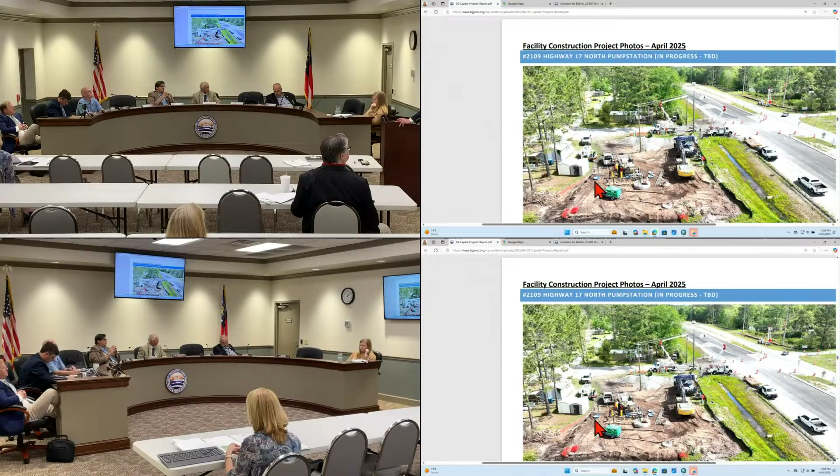There it is. Okay, Highway 17 North Pump Station. That was moving along, progressing very well. Also, if you drive by there, you'll see it looks a lot different than even these pictures here.

The above ground piping, which you can see some of it here, is all in place. I think we're probably going to see a startup on that in the next couple of weeks, I would believe, certainly by the end of the month.

All right, so the former private pump station was somewhere in this area, maybe a little further to the end of the DOT right of way, even somewhere out here. And that is gone now. The force main comes across and discharges this way back to the airport area, industrial park area.

Picture here. You can also see the Highway 17 widening project going on right now to the east of the site. Here's Georgia Power installing our pole to get 3-phase power, because all of our new stations are energized with 3-phase power. That's another standardization. Nice, good site.

Putting in three-phase power is more costly on the front end, but it reduces the size you need downstream for everything because it cuts the amperage requirements in half by going with three-phase power. Absolutely. Okay. There's that. Let's see.

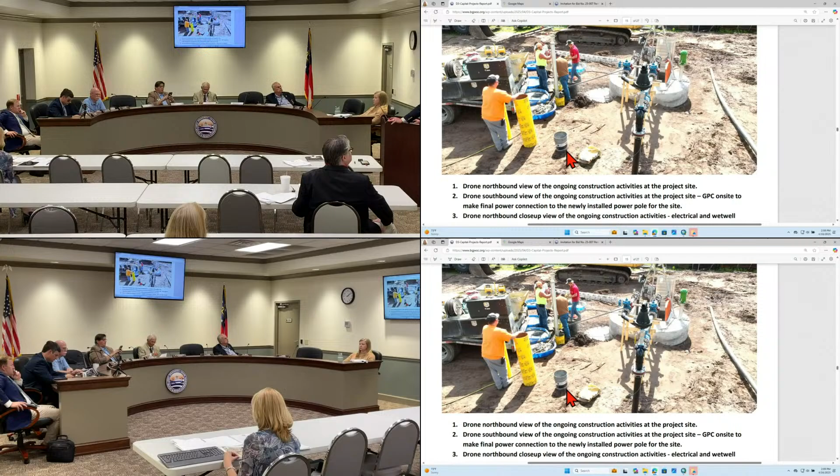All right, the last of the 3 pump station group is 3101. That rehab is also, here you can see a panel and whatnot, still going to be demolished. But that side as well.

Moving along, there's still the service drop. You can't really see it in the picture, but the Comcast building just to the south of us has a service drop from this power pole here. It comes across right across the top of the site, so that's not good for us. It's right here, and they're moving around. So that still has to be relocated by Georgia Power.

So far so good there. Looks like a lot going on here, but this panel here is going to get demolished and taken out.

And I think once it's done, maybe we're going to do some pump changes in this station. Valves, right? Maybe valves are the next thing we have to do in there. So a little in-house improvements. Again, the emphasis we honed down on with these 3 pump stations was electrical. That's what was called out in the master plan. It's the largest item.

Little shot back view there. These are the most beautiful bottle brush bushes if you ever get out there and look. They are the healthiest bottle brushes I've ever seen in my life. Apparently they like living next to a pump station.

Other than that, the next ones we'll be putting out would be the master plan update and the engineering for the neighborhood extensions for the SPLOST projects. So we've got to get that taken care of. Now that all three of the divisions of the other SPLOST project are awarded, we know what we're working with on the remaining funds.